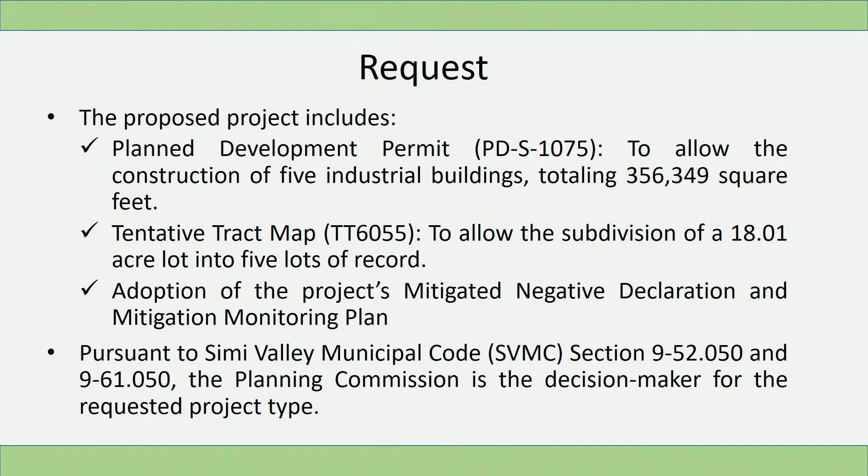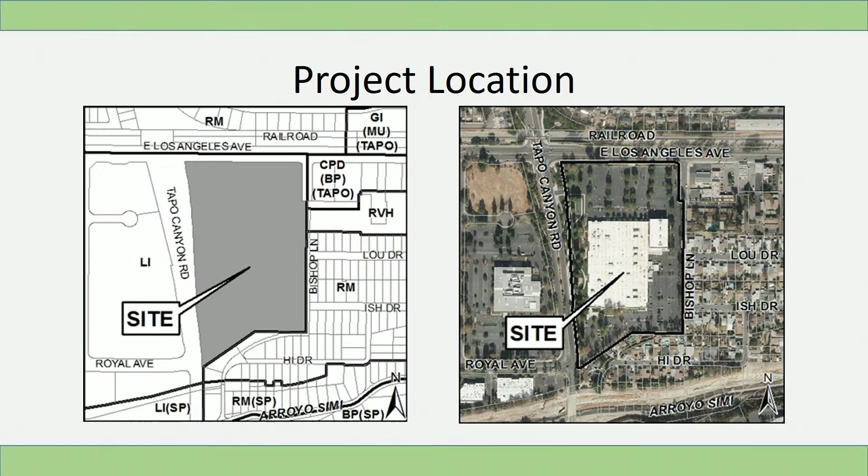The project is located at 1800 Tapo Canyon Road, at the corner of East LA and Tapo Canyon Road. Here's the project site, middle of the screen. To the east are single-family dwelling units, and on East LA Avenue is the retail center. Across is additional single-family dwelling units.

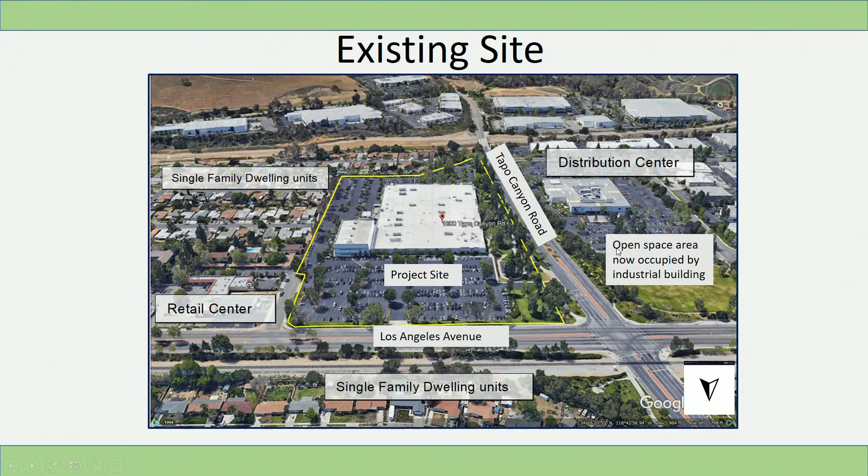To the side here is the distribution center of Amazon, and I believe the industrial building will now be occupying this open space area. The existing office building is vacant and was formerly a call center for Bank of America. The applicant proposes to redevelop the existing 18-acre lot, including demolition of the building, reconfiguration of the existing parking, circulation, and landscaping.

The project was presented to Neighborhood Council Number 2 on January 12, 2021, and the Executive Board voted 9-2 in favor of the project.

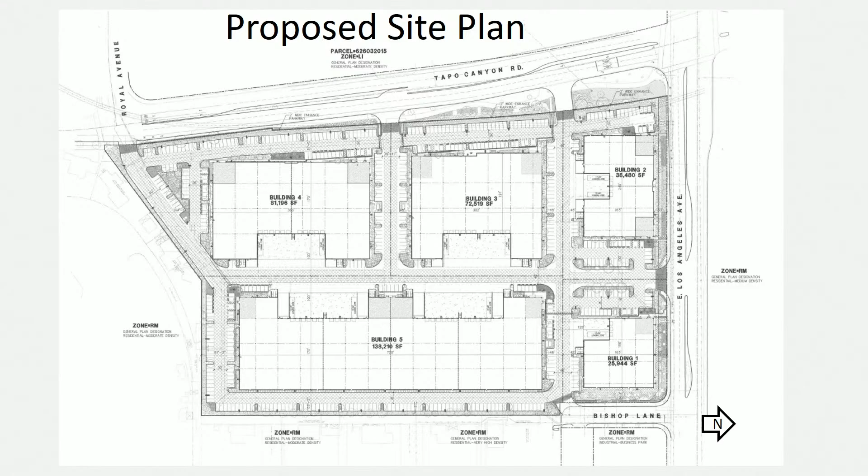Planned development conditions A17 and A16 will require the project to have a reciprocal parking agreement and require an updated parking tabulation with each tenant improvement.

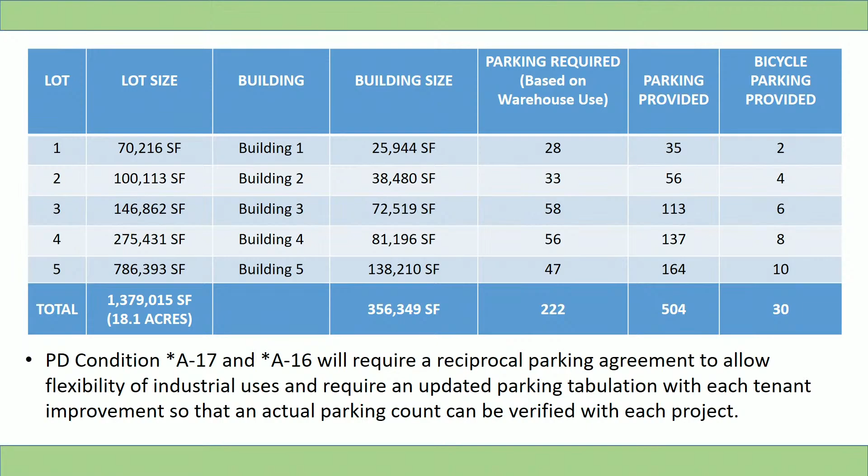So the next 5 slides are the building elevations for buildings 1 through 5. The building colors will include snowbound gray, screen network gray, inky blue, and the windows will be of blue reflective glazing.

You'll notice here on the sides of the building, they all have this treatment of metal, gray metal siding, along with black metal panels.

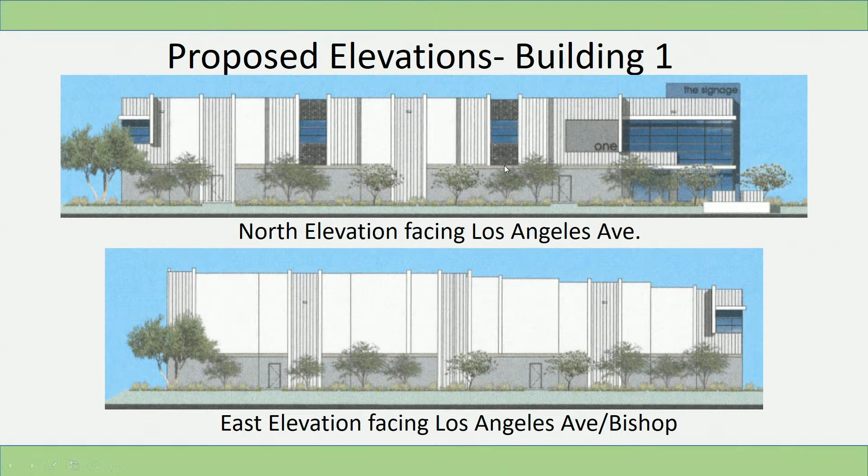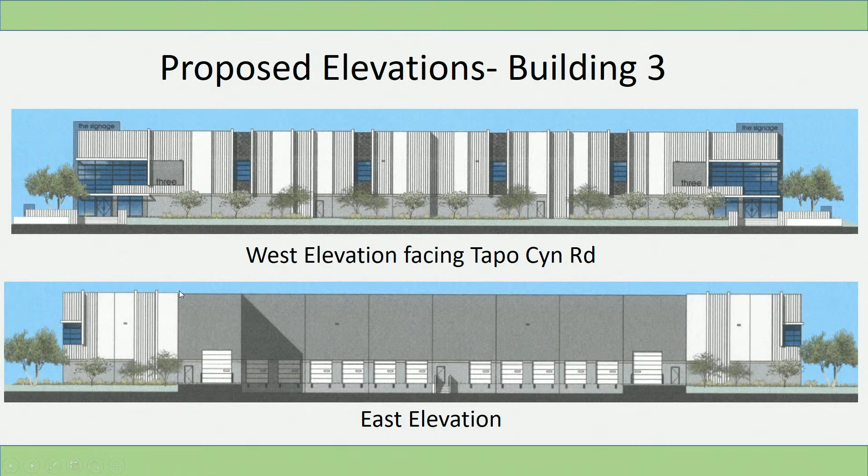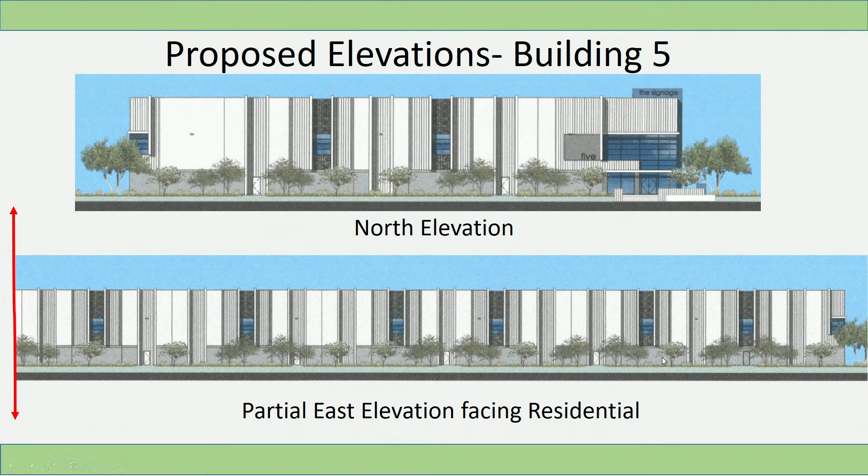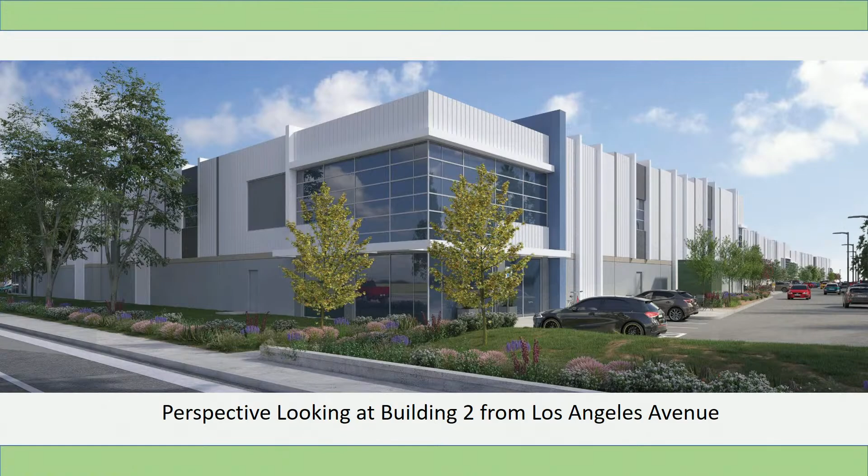We have a perspective looking at building 2 from Los Angeles Avenue, and a perspective looking at building 4 at Tapo Canyon. If you notice, all the entries have the same overhangs, the canopy overhangs.

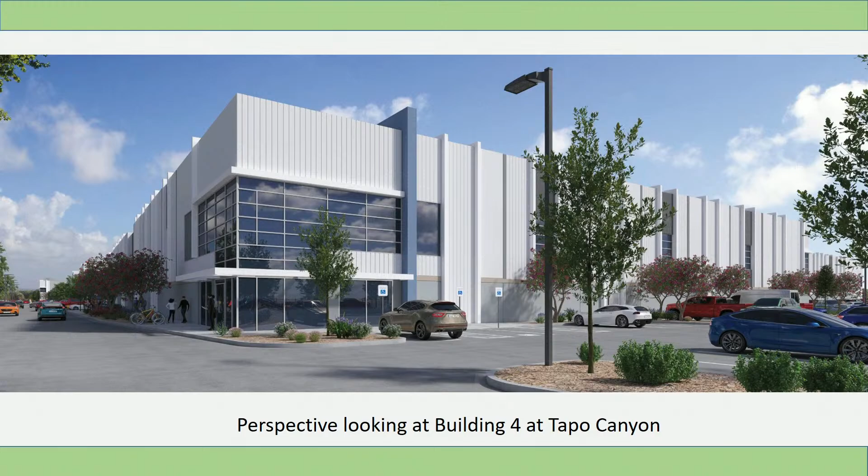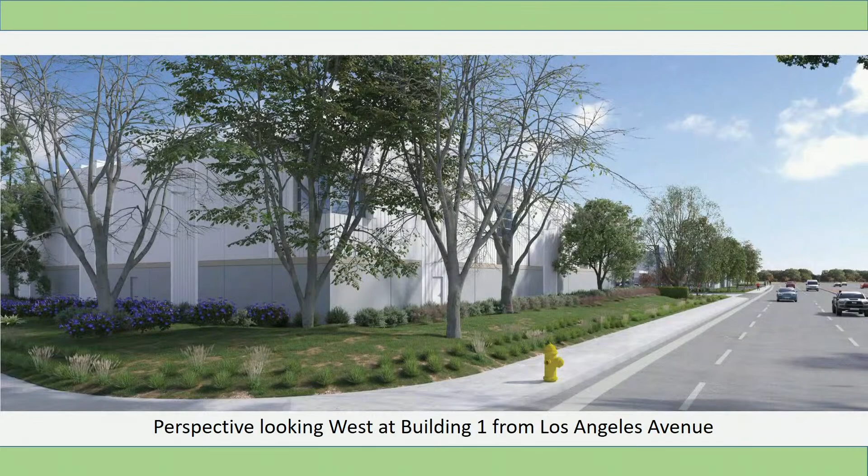And its perspective looking west at Building 1 from LA Avenue. And this is Building 5 from Bishop Lane.

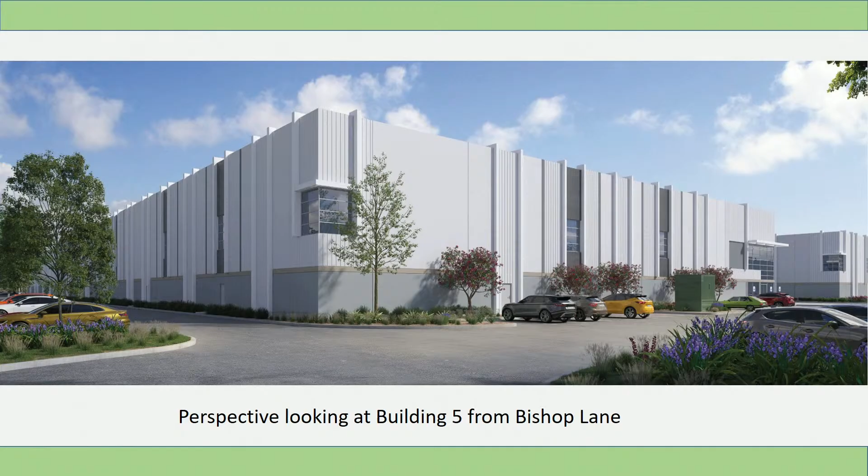There are a total of 228 existing trees, and the applicant is proposing to remove 126 to accommodate the development. The applicant proposes to address the loss by planting replacement trees of equal value located throughout the site. Although the project includes demoing the existing building and constructing improvements, the applicant will maintain existing landscaping and proposes additional planting as well.

There is a landscaped area located in the adjacent public right-of-way, and the applicant has agreed to maintain it. This will be assigned to the owner by the Public Works Landscape Division.

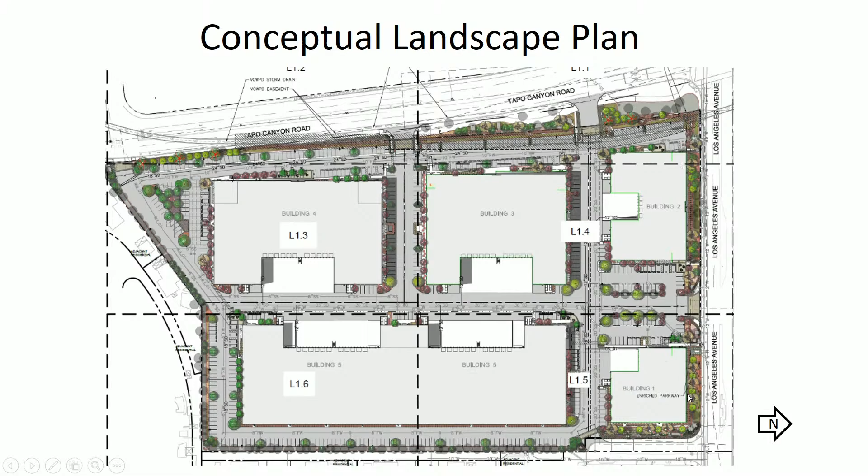An initial study was prepared for the project in accordance with the California Environmental Quality Act guidelines. A mitigated negative declaration and mitigation monitoring plan were prepared for the project as stated in the staff report.

Staff recommends to the Commission approval of Plan Development Permit Number PDS 1075, Tentative Tract Map Number TT 6055, adoption of the mitigated negative declaration, and approval of the mitigation monitoring plan based on the findings and conditions of approval included in the staff report. This concludes staff's presentation, and staff is available to address any questions.

Thank you. Thank you very much, Mr. Hernandez. Commissioners, any questions of staff?

Mr. Hernandez, I see a difference from the minimum number of parking spaces at 222 to what the applicant is proposing, which is 504 spaces. That's a huge difference. Is that because if the applicant was to have all office space, that's why there would be so many more needed parking spaces? Usually the argument goes the other way here—I'm just really curious why we have this massive excess of parking spaces.

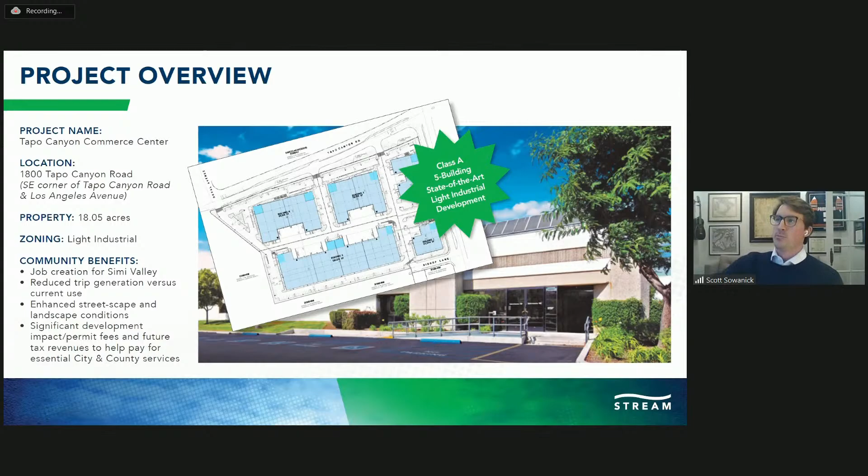So with that, I'll stop talking. I just want to say thank you to everybody for the opportunity to speak this evening. We're beyond excited about making this vision a reality. With that said, I'll kick it over to Patrick to talk about who we envision for future tenants at the property.

Hi everyone, Patrick Dubras here with Newmark. As Scott mentioned, we were involved with them on the acquisition of this site. We sold them the site.

Our team has been involved in most of the new projects here as far as industrial development in the city of Simi Valley. The industrial landscape still carries a tremendous amount of demand right now from a variety of different types of companies, both here in the city of Simi Valley, who are looking for opportunities to grow. We've seen the previous new builds in the city that have been successful in pre-leasing before they were completed.

We envision similar demand from a variety of business types. And I think for Commissioner Rice and Commissioner Hodge, with your questions pertaining to parking, this will shed a little bit of light. I was glad to hear those questions, because oftentimes what you'll find are developers trying to max site coverage, meaning they're trying to put as much building on there as they possibly can, which sometimes limits the potential for types of uses.

As opposed to retail and office, throughout the past 12 months industrial has carried the day in job creation and continues to do so here in North LA. Our biggest challenge right now as industrial brokers in the market is delivering quality Class A space. There's a huge dearth of that throughout the North LA market.

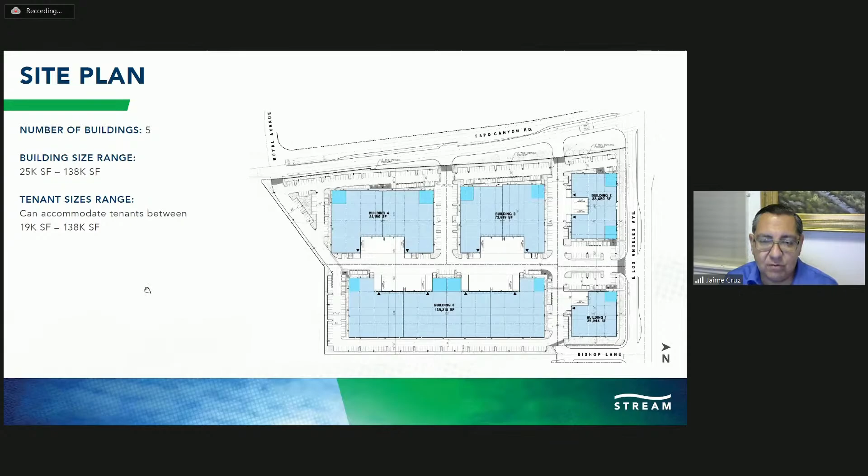And then as you see on this particular slide, the lighter blue colors are the office locations, which are facing the street, facing towards the west on Tapo Canyon, facing towards Los Angeles on the north. And even on the larger building, it's facing towards that new drive we're proposing off of Tapo Canyon, with a left turn pocket into the building, into the project site.

Next slide, please. So here you see the yellow highlighted areas are the actual trucking areas. You can see how they've been directed to face each other, each of our proposed buildings. And then you see the main entries are the ones with the circles on them, red and green, inbound lane on the north side off of Los Angeles Avenue. We have the main entrance into the buildings along the north side, which also allows easy access into the larger buildings further into the site. And then you see the proposed new left turn pocket off of Tapo Canyon coming in as our main entry that will serve the larger buildings.

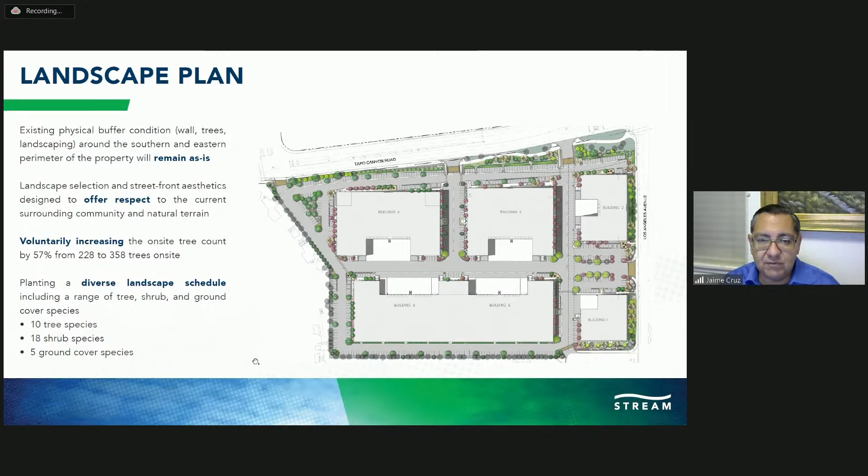Next slide, please. This is the view looking eastbound on Los Angeles Avenue, and you see the primary building. A couple of things to note, besides the office location, the 2-story high glass -- what you see with those score lines at the top middle of the image is intended to be a metal siding, prefabricated and pre-stained, that designates the office locations, repeated on vertical elements throughout the rest of the elevation. There's also a blue element, which highlights the separation of the office from the remainder of the building. One thing to note off of Los Angeles is that our project is maintaining, per the municipal requirements, the building setbacks as well as the elevation height limits. We're not requesting any kind of variance for our projects.

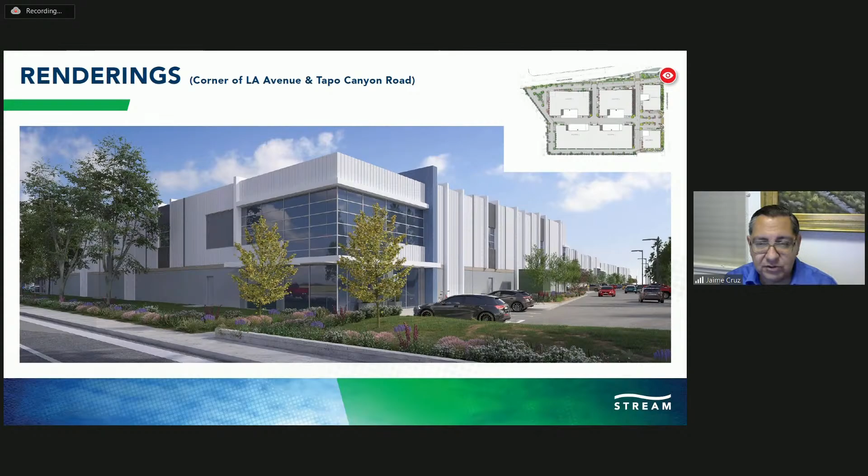Next slide, please. This one is looking northbound on Tapo Canyon. This is building 4 that you're looking at, and you see again the same kind of architecture wrapping around the building, the vertical elements breaking up what could be a very long facade here.

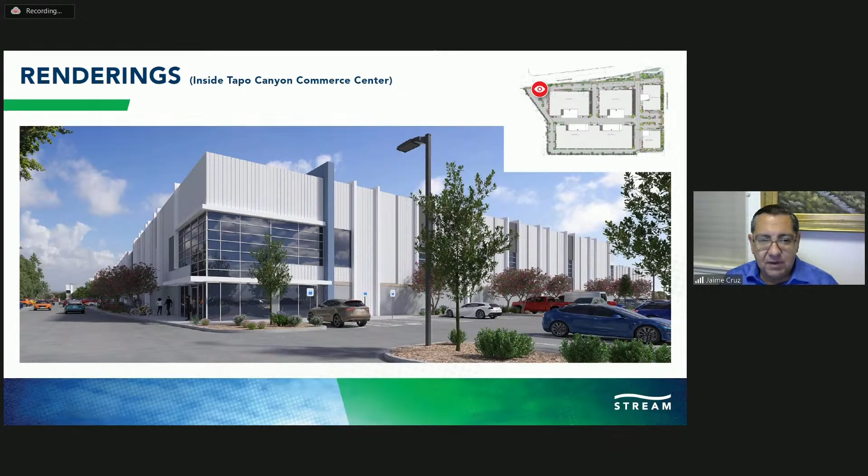Next slide, please. We're showing this view looking westbound on Los Angeles Avenue. This is the smallest building, building 1. Even though this is not the main office area, there's still glass that we are implementing at the upper level of the building, partly to get natural daylight into the warehouse space without having any security issues of having glass and storefront at street level. But you can also see the amount of landscaping that we're proposing.

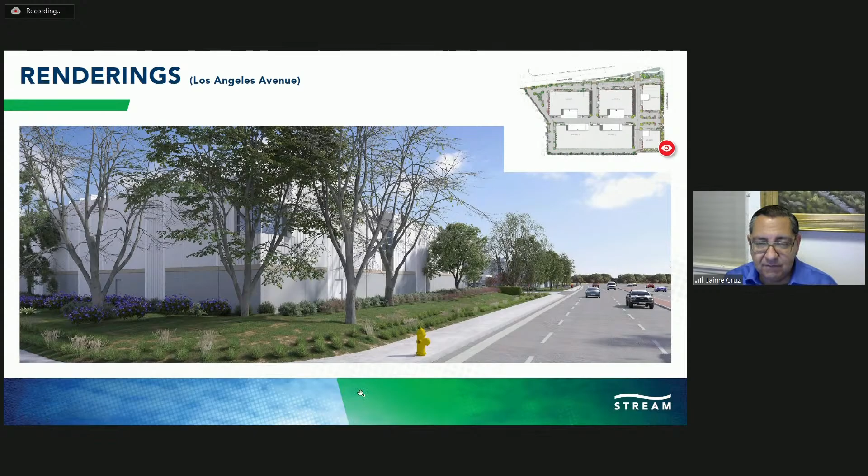And this is based on the required setbacks for the building size as well as the elevation heights. Next slide, please. And then some of the key features on our elevation.

A couple things to note: the number 11 on the right-hand side, the black area, is in the upper sections within the warehouse space. This is actually a perforated metal panel attached to the concrete panel. So you have the concrete, which will be painted white, and then these black perforated metals attached directly to it, but projected a little bit in front, casting a unique shadow pattern on that elevation. It doesn't quite read on this 2D elevation, but it's definitely more unique than just painting a black or white color on a simple concrete panel.

The other thing is the horizontal band that segregates the lower street level from the upper portions, running on all buildings, allowing these vertical elements to stand out when we have, as I mentioned before, these clerestory windows that provide daylight into the warehouse space.

And then the last thing is the blue higher points at the office. As you can see, those are obviously potential areas for signage for the tenants in the building.

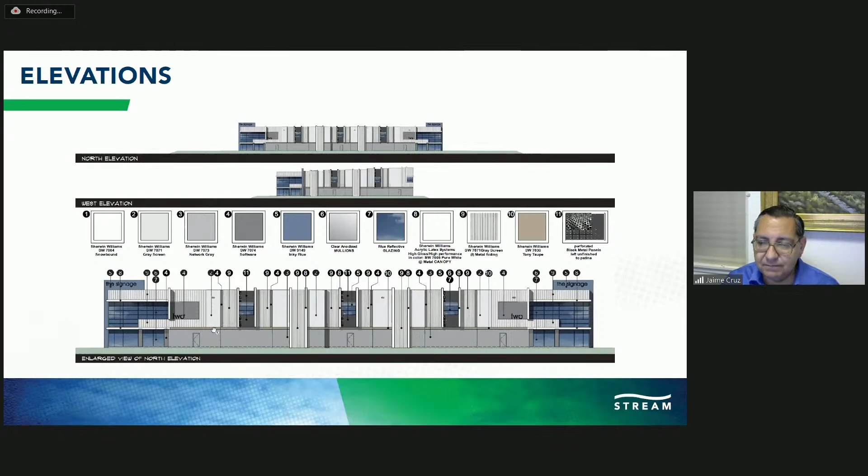So thank you to your staff for working with us, and I think getting a really exciting project put together.

Thanks, Jaime. So that concludes our presentation. If there are any questions that our project team can answer, we're more than happy to do so.

Okay, I'll repeat it. You timed that beautifully. It was just over your 15 minutes. Thank you very much for using your time wisely. Are there any questions of the applicant?

I have a couple questions briefly. By all means, go ahead, Commissioner Hodge. If we could put up an overview of the site plan, please. It shows the ingress and egress.

Sorry, Commissioner Hodge, I stopped sharing and now I'm resharing. Well, it says thank you. It's very gracious. Oh, that works. Okay, that one works too.

Okay, so the way I read the staff report, it references the entry and exit at Royal and Tapo as full turn, meaning that you anticipate that trucks could come in this driveway, correct? This one, if you can see my cursor, I'm not sure if you can. You can. Yes. All right.

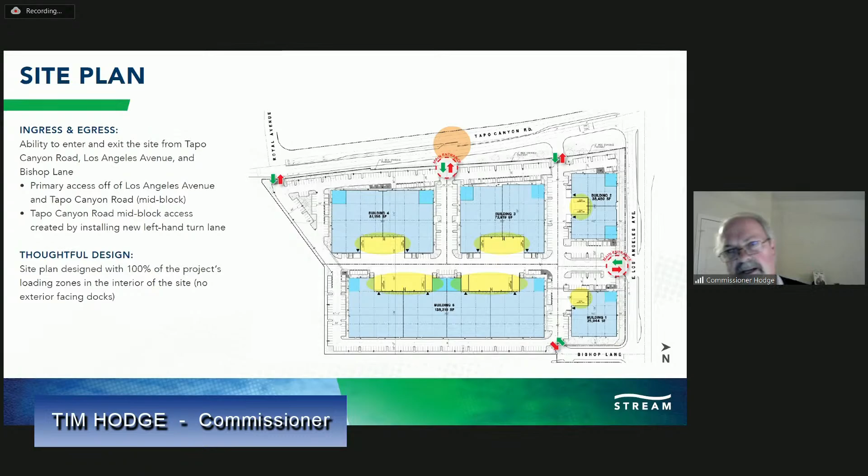Scott, can I make one comment for you? It's Albert Gerald, Stream Realty Partners. It's more of a question actually for our team - doesn't that drive currently exist today? Commissioner Hodge makes a valid point, and I'm not disputing that at all, but I believe that drive and access point exists for the current building today on site.

Is that right? Yeah, but it's not diesel trucks bringing in 53-foot trailers, it's automobiles. Sure, and typically that - who knows, I think it's a big difference. Yeah, for those of us who have ever worked with or lived near those kinds of things - I used to work at a grocery store where our loading dock was in the back, and there was an apartment building right by it.

I would imagine that the main entrance or the other entrances would be entirely adequate, so that you could perhaps in the CC&Rs limit that, to take a little bit of that noise factor and diesel smell off their shoulders at night. I think we could look at that, plus some signage that clearly states no trucks after a certain hour. I think that would be a really good thing to do, and the neighbors would probably appreciate it.

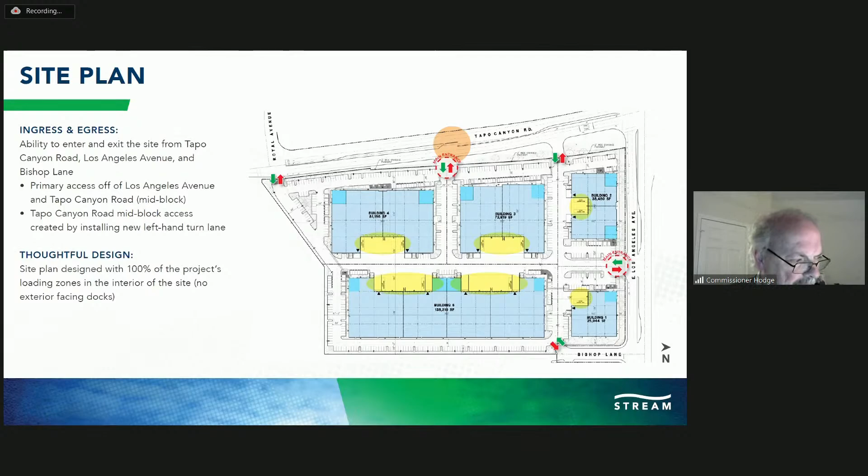Scott or Shardlow, do you have any further comments on that matter? No, I don't. John, do you? Yeah, I would just say I think that might be a good idea. Signage perhaps on the block wall on the south side, just saying please be considerate of your neighbors. Sometimes truck drivers don't understand what's there.

From a path of least resistance issue, truck drivers kind of go where it makes the most sense. I think what makes the most sense is probably the main entrance. It's probably very unlikely that you'd have a conflict after 10 o'clock at night, since all the bays are centered in the interior to reduce noise. But to the extent you did have two tenants operating at the same time, you'd want to make sure their trucks aren't conflicting.

I think this is something that will resolve during the property owners association once the tenants are identified, but we'll certainly be good neighbors. So we'll definitely take a look at any restrictions we can place on truck traffic to that south drive aisle.

The intent of that additional left turn lane on Tapo Canyon was really to cut that traffic off and get them to come into the park further to the north. That's why we wanted that middle drive to give them a shorter access to the buildings. But I think in the CC&Rs, and through some very plain signage at that entry, we could accomplish what you're talking about, Commissioner. Thank you.

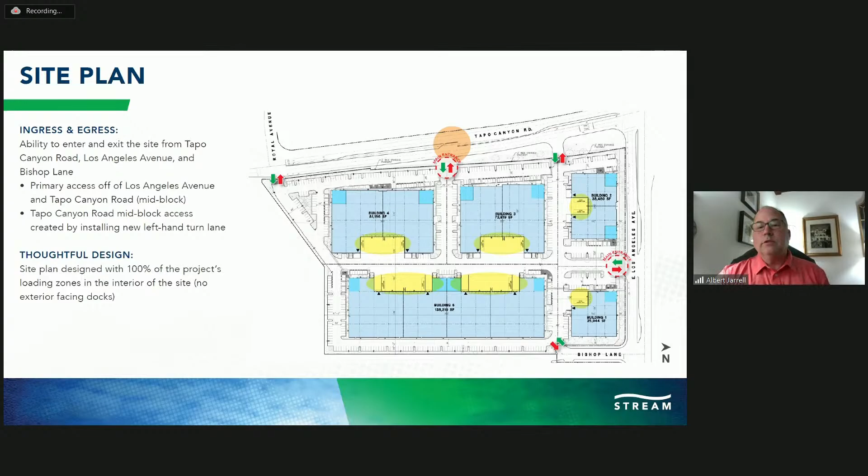Commissioner Hodge, if I might interject, the applicant's offerings notwithstanding, Royal Avenue is not a truck route. So there would be limited potential for trucks entering that driveway unless they miss the middle driveway on Tapo Canyon. Even better. But a little positive reinforcement of those things I think would assuage the concerns of the neighbors. And if they're happy, it makes you even happier.

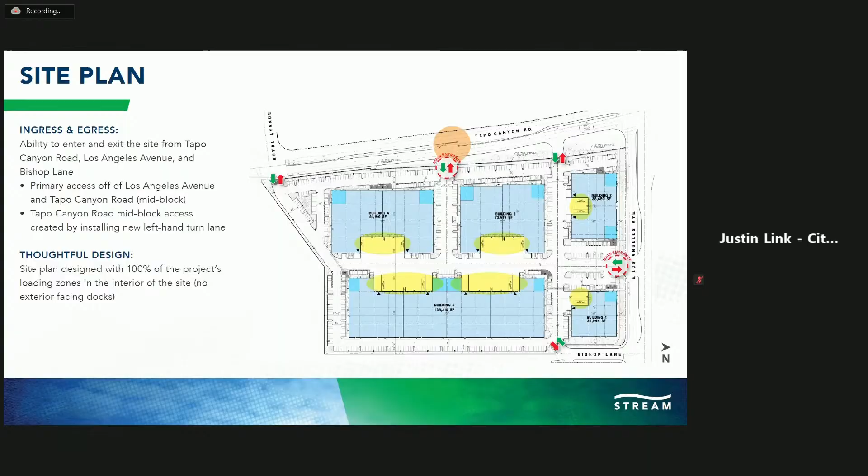Commissioner Hodge, the planning staff, you could recommend that we add a condition to require the statement be added to the CC&Rs regarding prohibiting truck traffic at the southerly Tapo Canyon driveway, and also perhaps the Bishop Lane driveway, between 10 p.m. and 7 a.m. We could require that statement in the CC&Rs should he make that motion.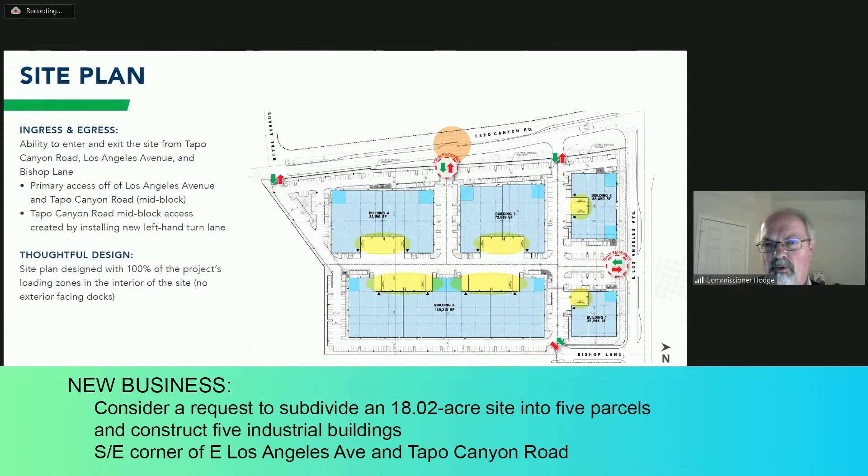I would like to see that. It seems to me unlikely that they're going to have so much volume at night, at midnight or 1 o'clock in the morning, that limiting the access points to the main entrance and the northern exits wouldn't be adequate. And it would certainly make me feel better that we did our job for the benefit of the neighbors there, and to enhance their quality of life.

Yeah, this is Jonathan Charlo. We understand the point. I'm not sure if a condition is necessary. We'd like to maintain the flexibility. The traffic study did analyze full movements at these sites. The main entrance coming off the freeway is obviously going to be the entrance that's already dictated. It seems odd that someone would go there. So we think we can enforce and self-police through the property owners association.

Yeah, I think you probably can too. My concern is that at some point, the staff report says you're going to sell. I think you guys and your companies are going to be terrific neighbors, but at some point you're not going to own this property, according to the staff report, and I wouldn't mind having a little more guidance in there. It doesn't seem unreasonable. We'll see what the other commissioners say.

I appreciate that the traffic report was prepared with these other things in mind, and I somehow doubt that it's going to be a problem. If it's going to be a problem, frankly, if it turns out your tenants have a lot of trucks going over there, you're going to have a problem with the neighbors jumping up and down claiming nuisance, and you just don't need that. So let me give one example, and I certainly won't belabor the point.

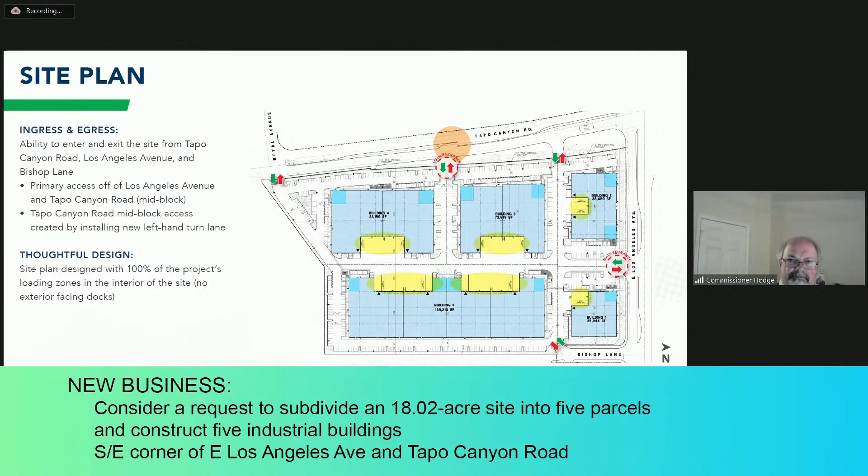Yes, please. Do we have any other questions? Okay, no other questions of the applicant. Did we receive any requests from members of the public to make a public statement on Zoom?